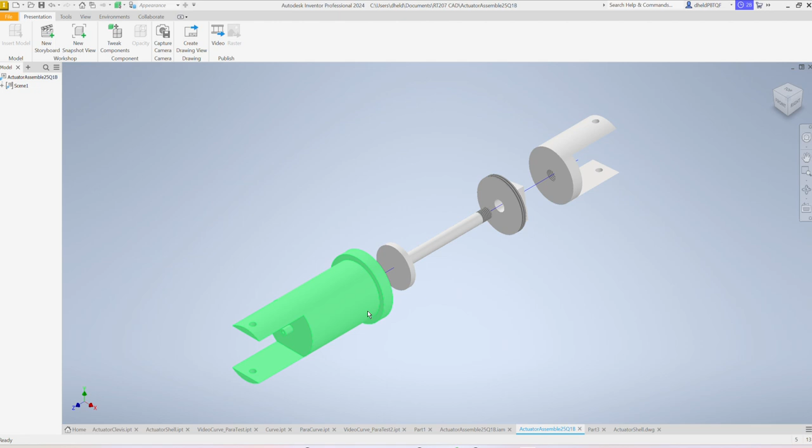Welcome. Today we're going to work on assembling our actuator. This is our exploded view that we're going to want to take. Alright. So, to start, we're going to go to New. Whoops. I'm going to say File, New, Assembly.

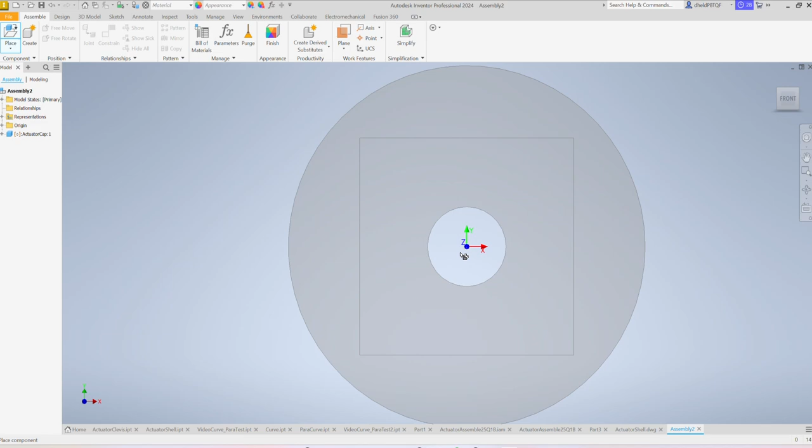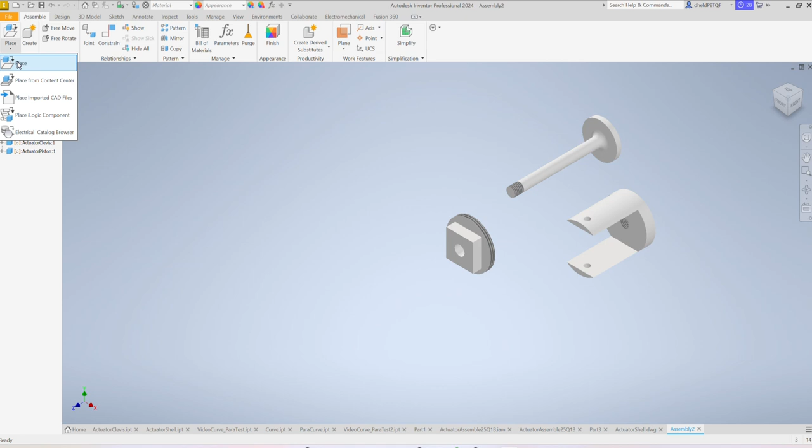Now I'm going to click Place and Place, and I want my cap. Open. I'll set down my cap, and I can set down multiple caps if I want, but I don't. I just want one. And then I can bring in my clevis. Okay, and escape. And let's get the piston. Open. And finally, let's get the shell. Place shell. So obviously, you're going to need to draw all these first.

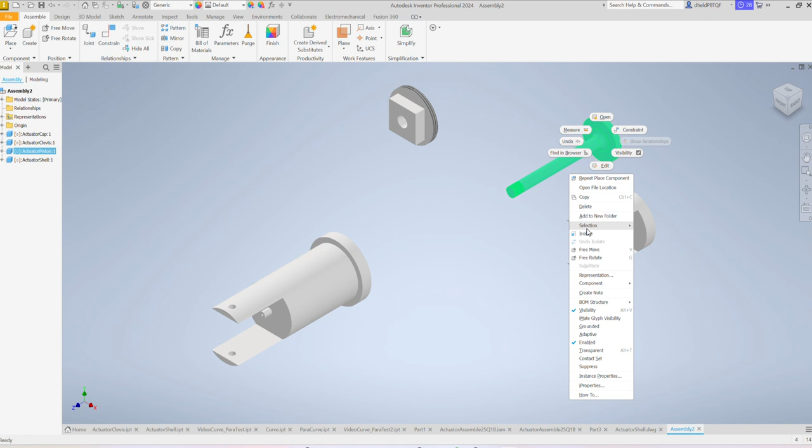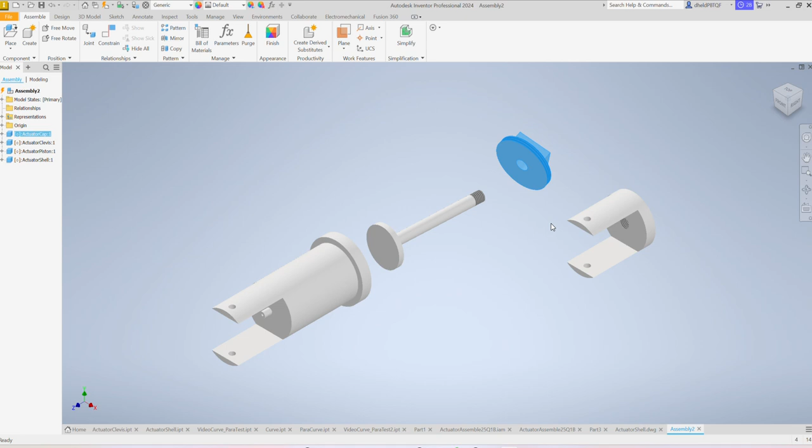Okay. And so we're going to line these up and assemble them together. All right. So I'm going to right-click the piston. I'm going to free rotate it because it's going to go in like so. And then next is going to go this cap, and same thing. I'm going to flip it around because it's going to go more like that. And then finally this clevis is going to flip around as well. So I'm going to free rotate it so it's more like that.

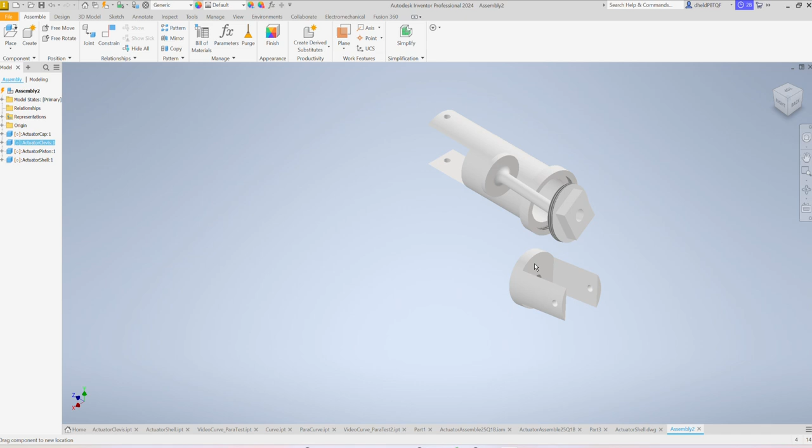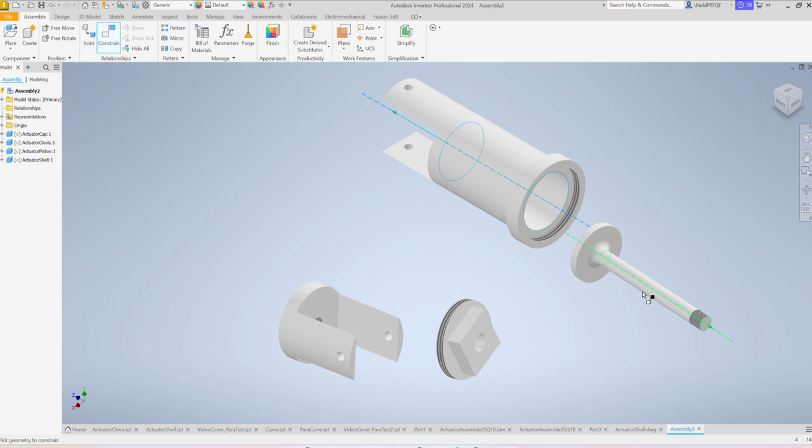All right. Now I'm going to look at it from this angle, like so, and I can see those didn't really line up where I wanted them, so I'm going to move them around, and now I have this lined up the way I want. So I'm going to constrain, and I want to click on this so that, see how it has the line there? It's green. It's kind of hard for you to see probably. But I'm going to line those two up like that. And there's a little menu over here. We're going to click on Aligned. No. Click back here. We'll leave it like that and say Apply. And now the piston comes in and out.

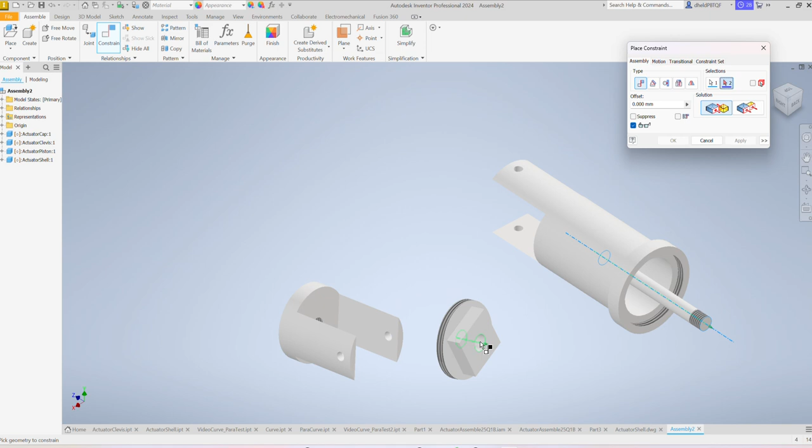Perfect. So next, I'm going to constrain the center of this piston along the center of that cap. I'm going to hit cancel though. Let me bring this out more. And I'll try that again. Constrain, center of the piston, center of the cap, just like that. You can hear it makes a little clicking noise. I'm going to hit apply.

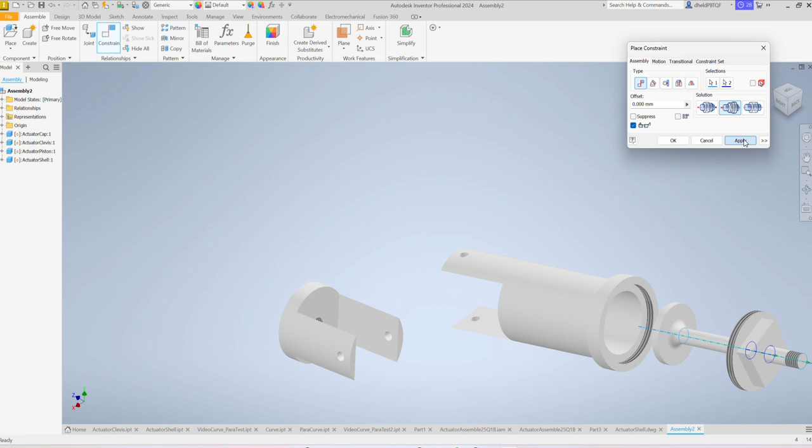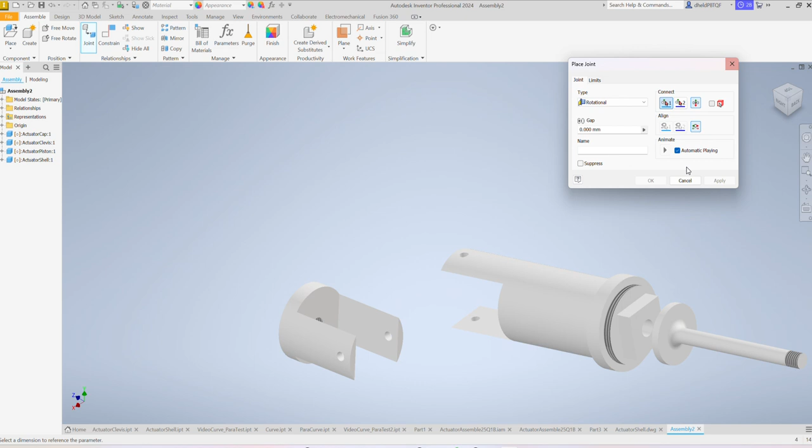I'm also going to put a joint in. And I have this joint here. I'm going to make it rotational. And I'm going to make it between this and that. And that's going to rotate in. Hit apply. And it's good. See, this goes in there like that.

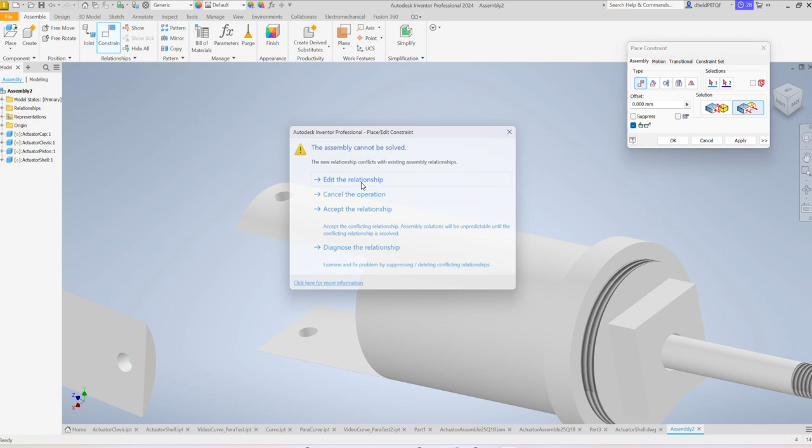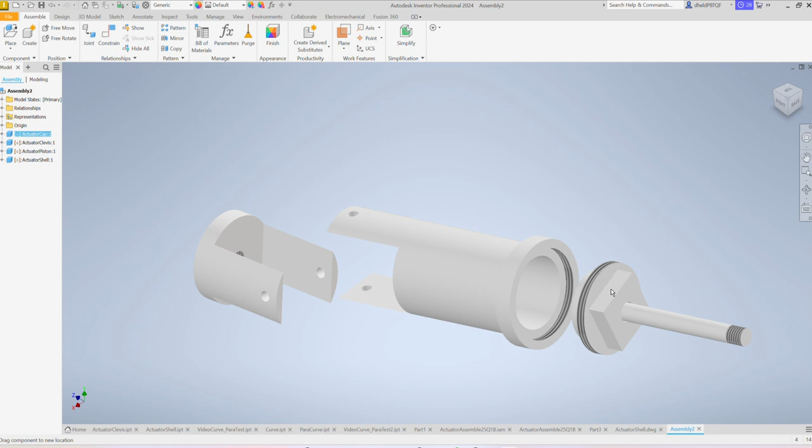But I'm going to constrain it again, and this time I'm going to constrain this face with this face, and I'm going to make them flush. Apply, and I'm going to say edit the relationship, apply, and accept the relationship. No? I don't know. So I'm going to back up a little bit. I'm going to leave this on. Alright, so this has got that relationship. Maybe I'll just do this. I'll constrain this face and this face, and butt it together and hit apply. Okay, there, that helped. Alright, that's good.

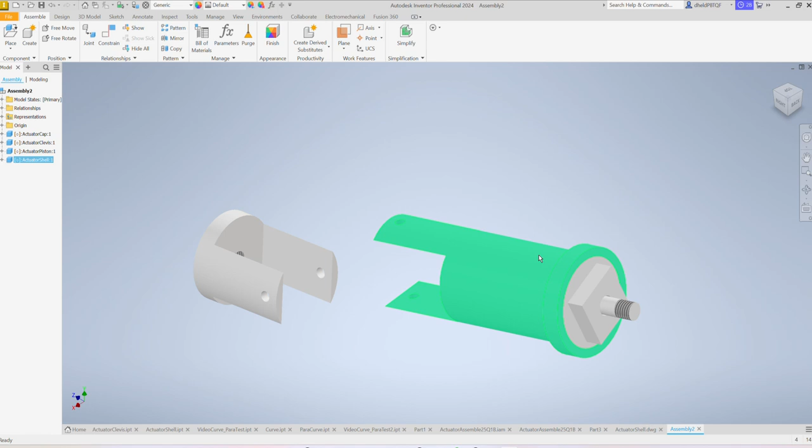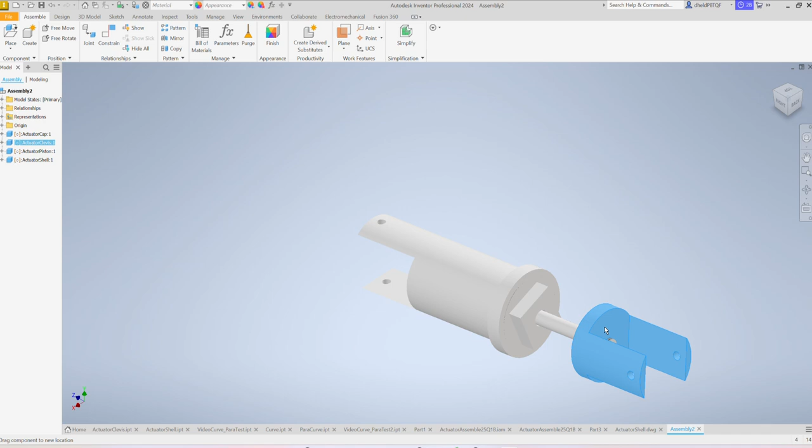Alright, now I'm going to constrain. I'm going to hit escape. Let's move this over here. I'm going to constrain, and I have the line, and I want that going through the center. So there we go. And I'm going to hit OK. And so same thing, but I'm also going to constrain this face right here with this face and make it flush and hit apply. And there we go. I've got my assembly finished.

I'm going to want to save this so that I can then put it in a drawing template. And you don't need to annotate the measurements because you did that in the previous lab. You just need to make your different views. Alright, we'll see you on the next one.

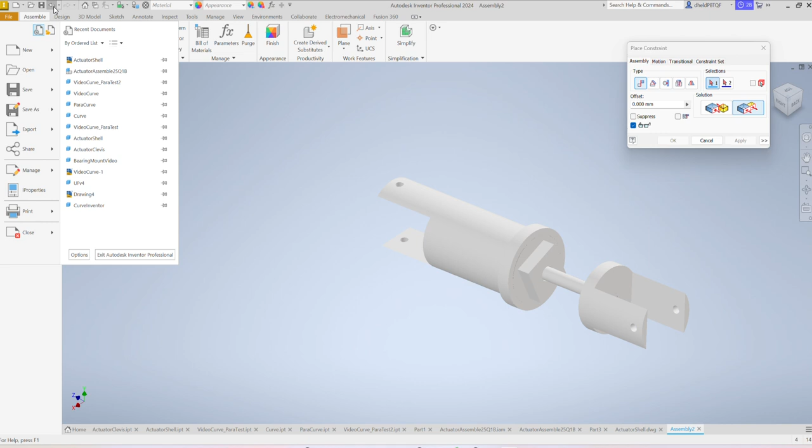Oh, well, hang on. I'm not going to end yet. Because you're going to need to submit this two different ways. One way is on the drawing template. The second way is you want to make an exploded view. And so to do that, you're going to want to make a presentation. And so I'm going to save this. So save. I'm saving it as assembly 2. That's fine. Assembly 2 already exists. That's okay. Yes to all. All right.

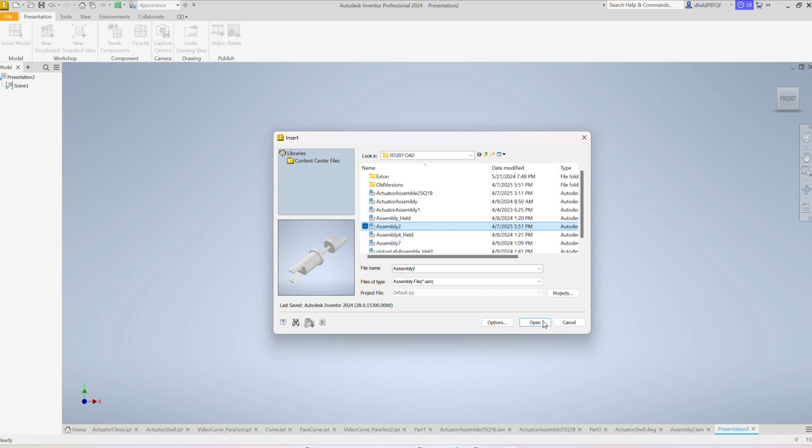So now I'm going to make a new presentation, and that presentation is going to be out of assembly 2, and I'm going to say open, and there's this button here, tweak components, so I'm going to click this, and I want to move, and I just want to move it on this one axis here. I'm going to move it out like this, so I can back up and move back in.

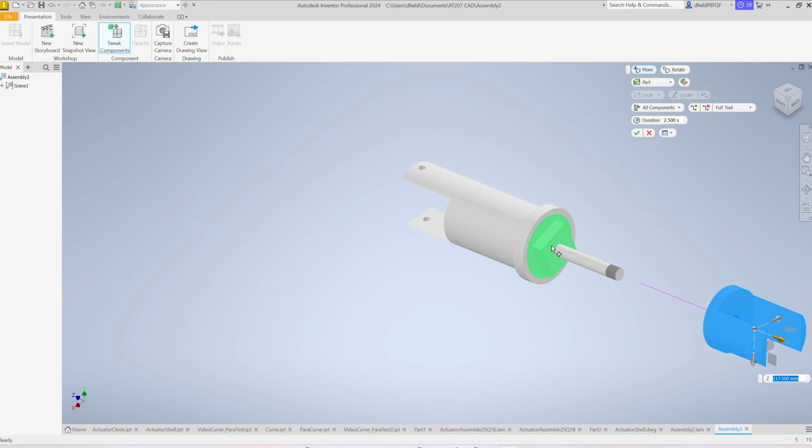Now I'm going to grab this one and bring this out and click this one and bring it out. Maybe click this, bring it back a little. And I can bring this back a little. Just keep it on that same axis. There. I'd click right there. Boom. I'll hit escape.

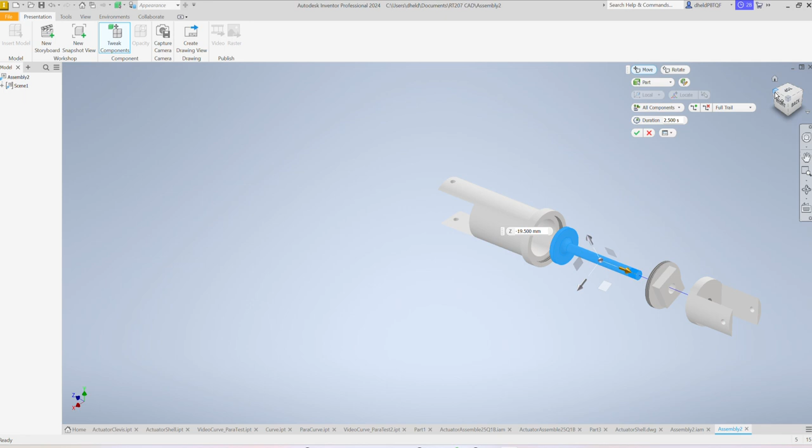There's my exploded view. So that one screenshot like that, and then the other one of your assembly on a drawing, inside your drawing template with 3 orthographic views and 1 isometric. All right. Good luck.